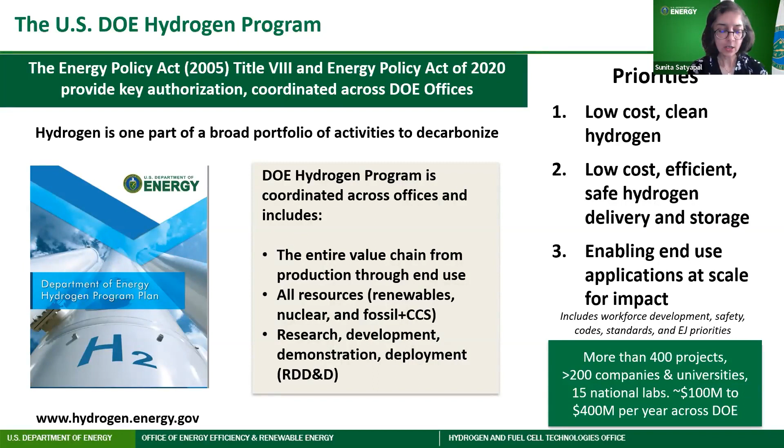So that's really our main focus. And that includes workforce development, safety codes and standards, our environmental justice priorities. So in the US, we have the administration priorities in addition to net zero by 2050, a clean grid by 2035, an initiative called Justice 40, where 40% of our federal benefits would impact disadvantaged communities and those who've historically experienced environmental injustice.

And so the H2 at Scale initiative is our key focus, which really depicts the Swiss Army knife perspective of hydrogen. So you can see the versatility, the fact we can use all the resources on the left. And today we have the conventional gas grid shown in gray and the red conventional electric grid, but you can also bypass those and produce hydrogen and then use it for multiple end use applications. So either for power back to the grid or fuel or feedstock. So it really represents that versatility, the flexibility, and providing different options for hydrogen.

But our focus is really hard to decarbonize sectors. So first, industrial applications such as steel alone accounts for over 7% of global emissions, ammonia, other examples, chemical fuels, transportation, especially heavy duty transport, and then power and energy storage.

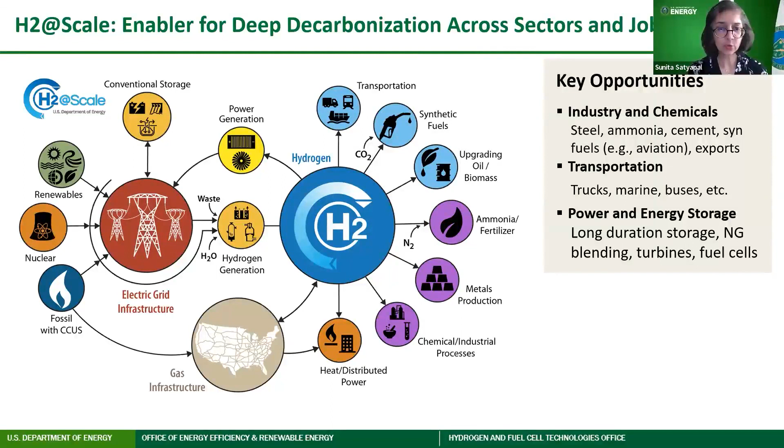From the US perspective, with our administration's goal of a completely clean grid by 2035, as we see renewables increase, we'll have greater need for long duration storage. We already produce about 10 million metric tons of hydrogen per year, and we see scenarios for significantly more. If we produced another 10 million tons, that would basically require doubling today's solar or wind deployment. So there's huge opportunity for nuclear to hydrogen.

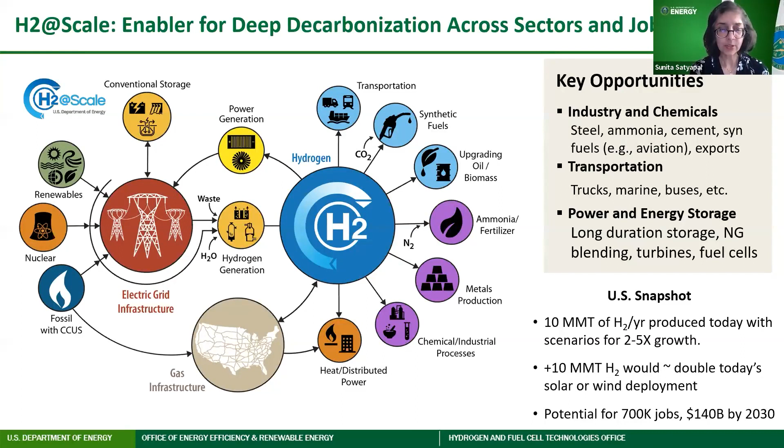Where are we today in the US? We actually have thousands of fuel cells, multiple applications, niche markets such as over 50,000 forklifts operating in major distribution warehouses - Amazon, Walmart, major companies - for completely zero emissions, over 115 hydrogen stations just for the fuel cell market. That's really helped incentivize the market, build up the infrastructure: backup power, thousands of fuel cells for cell phone towers, stationary power, over 12,000 commercial vehicles mostly in California, about 50 stations, buses.

The top map shows that most regions have natural gas to hydrogen, some flagship projects there. The bottom map shows examples of PEMs, proton exchange membrane electrolyzer installations. This is continuously changing; this is the version we posted from June of last year, and we'll be updating it, but you can see over 170 megawatts. We also have over 1,600 miles of hydrogen dedicated pipeline in the US, about 3 geological caverns, including the world's largest in Texas. So we see this growing infrastructure in this nascent market.

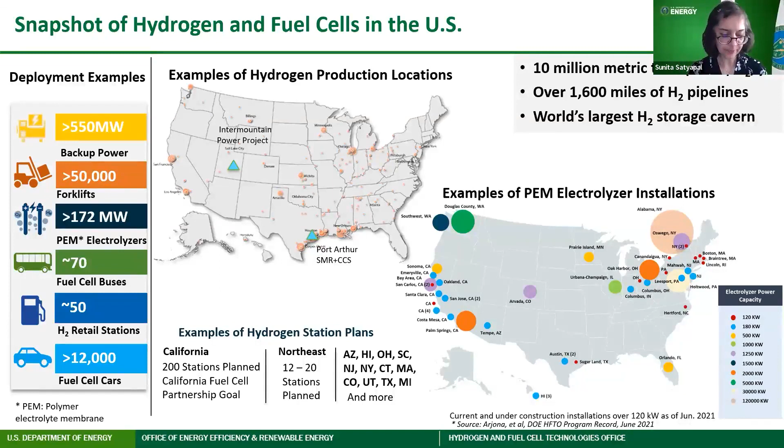I wanted to emphasize the nuclear projects. We're really excited, both my office and the Office of Nuclear Energy at DOE, co-funding 5 projects now, very recently announced, specifically for nuclear to hydrogen. These will be coming online in the next few years, and you can see the geographical variation here - specific plants in Ohio, New York, and others around the country. We'll be using electrolysis and producing hydrogen, and basically these will be first of a kind demonstrations.

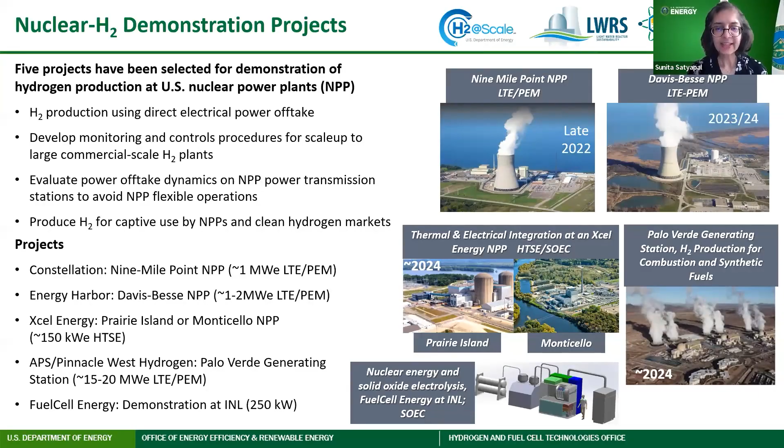The next slide will summarize the key initiative here that I want to emphasize, which is the hydrogen shot. We had, in response to President Biden's request last year at the climate summit to our Secretary of Energy, a question of how can we really accelerate our progress. This is similar to the moonshot that the US had over half a century ago with John F. Kennedy. There'll be a series of energy Earth shots, and the very first was the hydrogen shot, a bold ambitious target of 1-1-1: $1 for 1 kilogram of clean hydrogen in 1 decade. That is the shot, and we have all hands on deck to achieve that goal within a decade.

With all of those challenges and needs, I wanted to highlight the most recent announcements in the US with the Bipartisan Infrastructure Law, or Infrastructure Investment and Jobs Act. This provides $9.5 billion for clean hydrogen, including $1.5 billion both for electrolysis - that's $1 billion - and then $500 million for clean hydrogen manufacturing and recycling. So we'll start with the end of life in mind, whether it's catalysts or other components, designed for recyclability and sustainability.

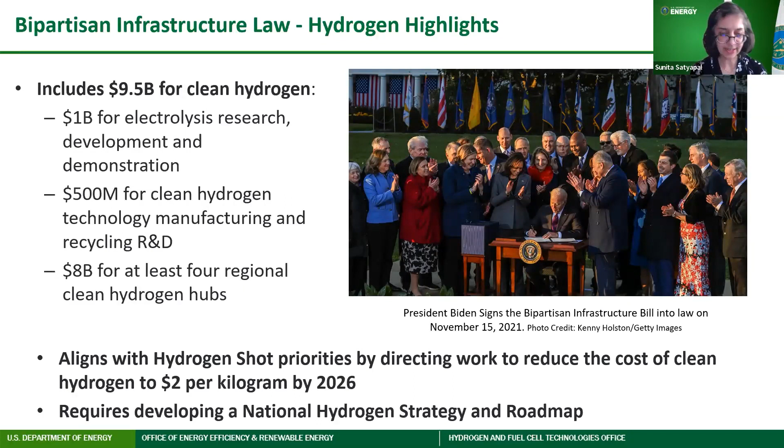This is a very quickly moving field, so feel free to stay tuned. We have Increase Your H2IQ webinars, newsletters, a Center for Hydrogen Safety with over 70 global members and partners, industry, and the Hydrogen Council, providing training material, accreditation, incidents and best practices. Then June 6th to 8th we have our virtual DOE-wide hydrogen program review, where we'll present our hundreds of projects. We typically get a couple of thousand people.

1.008 is the atomic weight of hydrogen, so October 8th is designated in the US as National Hydrogen Day, where again we spread the word. Public awareness is one of the challenges, so please do feel free to sign up for any of our resource information.

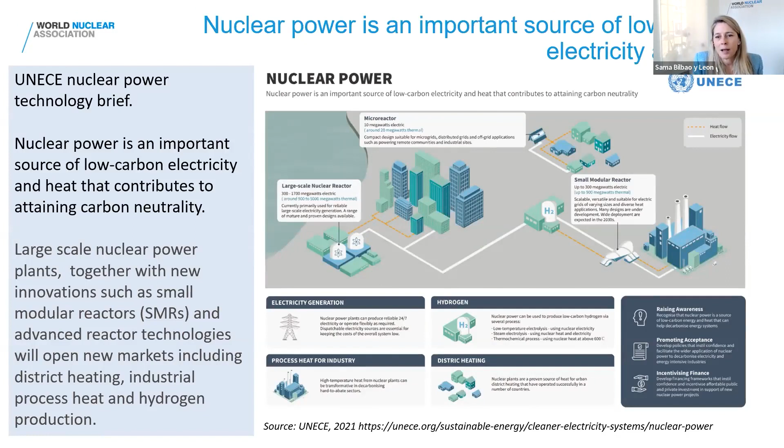One thing I would like to highlight is that this brief emphasizes that in order to achieve this energy transition, we are going to need large-scale nuclear power plants. We are also going to need small modular reactors and advanced reactors using different technologies, as well as micro reactors - they all have their different optimum applications and all have an important role to play. So if we go to the next slide, I'd like to show you another very important document that is part of this toolkit, which is the report on life cycle assessment of energy sources.

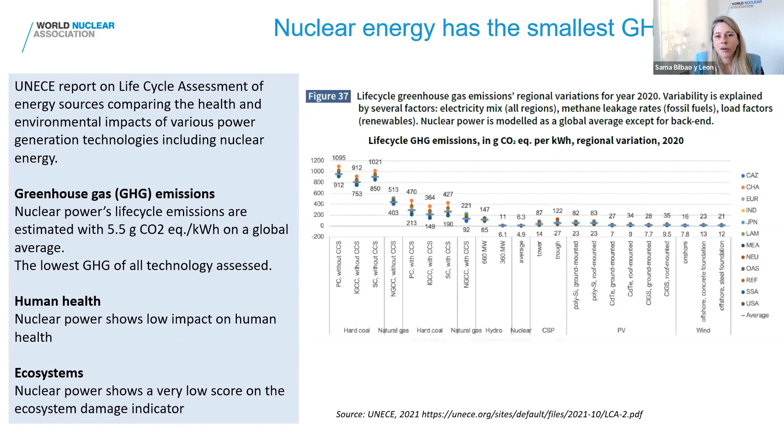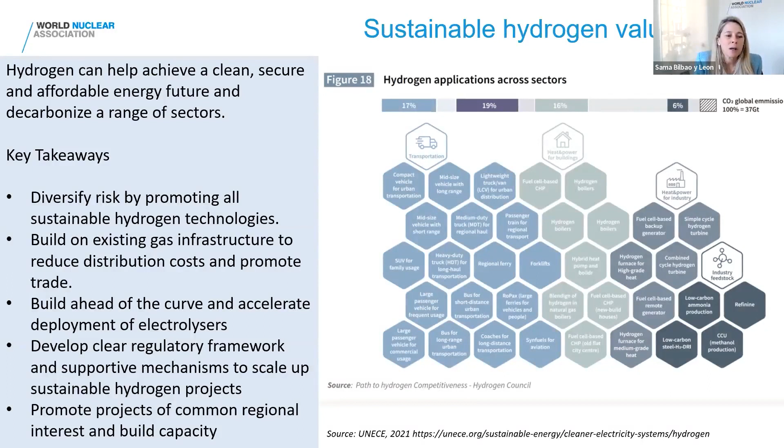So let me finalize very quickly, Shannon. In addition to these documents already available on the website, I want to highlight that UNECE is working on a project on sustainable hydrogen production pathways. The project is working on the premise that hydrogen could supply up to 24% of the world's energy by 2050. This project is particularly aimed to help countries in Eastern Europe and Central Asia develop their national hydrogen action plans and accelerate any needed action.

I'm not going to walk you through the different phases, but I think this is a very solid project that, like many of the other activities in UNECE, is an excellent opportunity to develop capabilities and move forward in this clean energy transition.

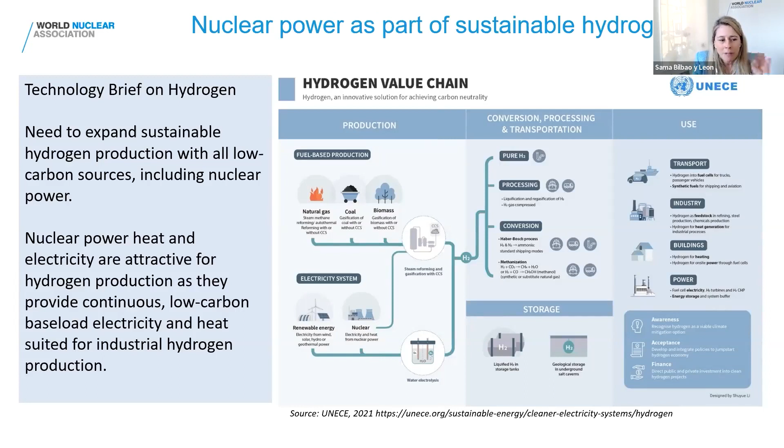So I'll stop here. You can go to the last slide, but with this I'll stop, and I'm back to you, Shannon.

Thank you so much, Sama. That sounds really exciting. It's nice to see some of these collaborative efforts globally.

What would you say is the unique value of this UNECE toolkit, specifically to policymakers? Well, I think that, first of all, it comes from UNECE, so that already comes with a very strong pedigree.

As you know, all UN organizations are very interactive with all the member states. So we are making sure that it's going to reach the right people at the government levels in a very large number of countries, because the UNECE is a very large part of the world.

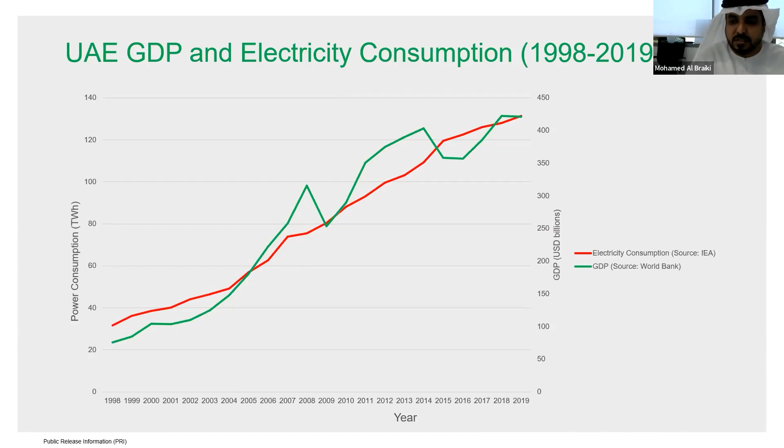If we go to the next slide, as you can see, we all recognize that the world is facing an enormous challenge in the face of rising emissions and climate change. In developed economies, this is looked at from the perspective of reducing emissions. At the same time, growing economies like the UAE need an increasing amount of energy to power that economic growth. Generating the electricity needed to ensure sustained economic growth is one aspect, but this is compounded by the need to do this using clean energy technologies.

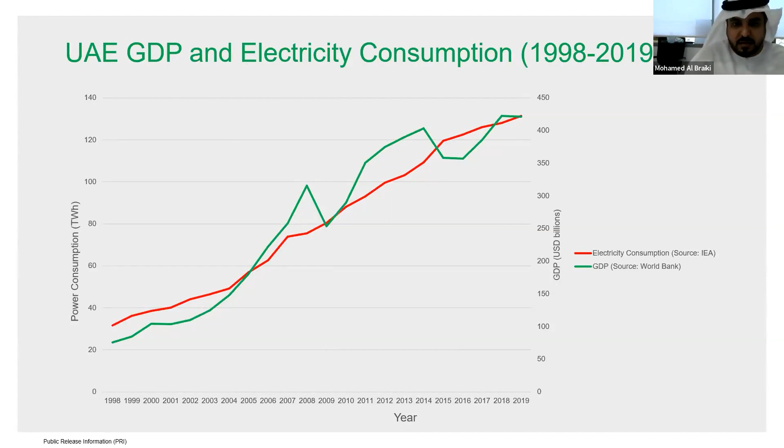In fact, the UAE was the first country in the region to commit to achieving net zero emissions by 2050 for electricity production. The only way we can do this is by using a combination of reliable, zero carbon nuclear energy and renewables, especially when it comes to solar power. But to decarbonize other sectors, we would need low carbon alternatives like hydrogen.

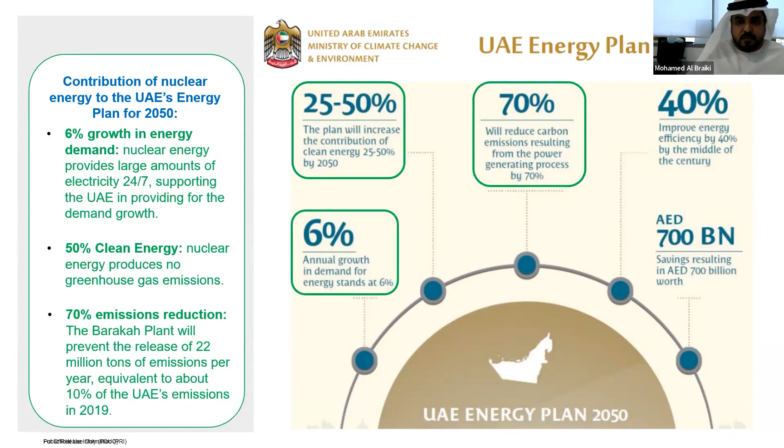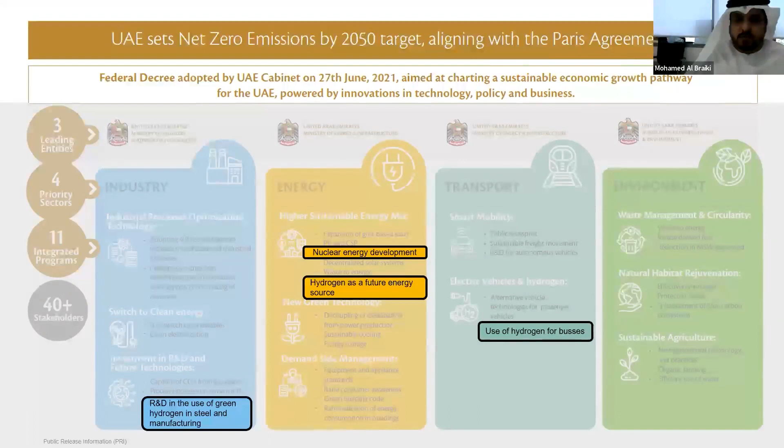At the next slide, I'd like to shed some light on the UAE's pathway to net zero. Net zero is powered by over 11 integrated programs in 4 priority sectors, outlined in the federal decree published by the UAE Cabinet in June last year. Most notably here is the sustainable energy mix, which includes nuclear energy development. The Barakah plant is already leading the largest decarbonization effort in the UAE and will reduce the nation's carbon emissions by 22.4 million tons every year. That is like taking 4.8 million cars off the roads annually.

Additionally, we see the need for hydrogen as a future energy source in industry, energy, and transportation.

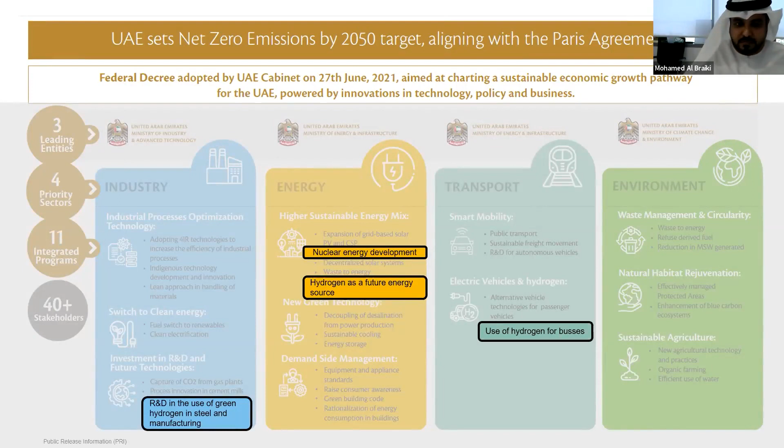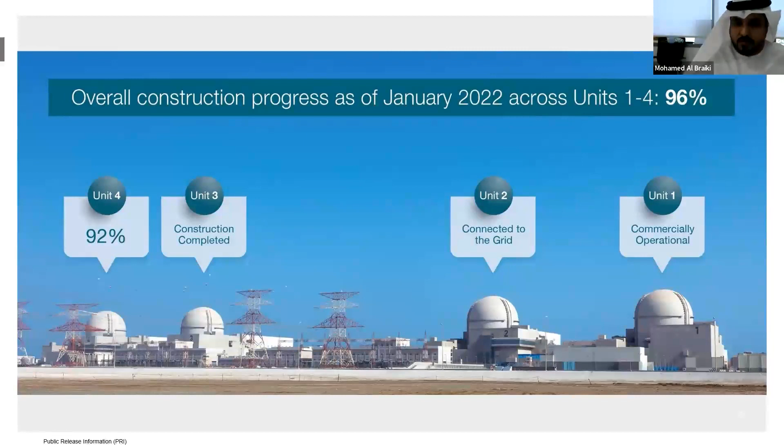Next slide, thank you. However, having the 4 plants fully operational, the plant has a much bigger potential than just electricity generation. Many existing light water reactor plants, as we heard from Dr. Sunita and Sama, are beginning to integrate electrolysis equipment at their plants to cleanly and affordably meet their own hydrogen demand. An early opportunity for ENEC is to install electrolysis at Barakah plants and establish a leading edge in technology capability. The 4 units of the plant have the potential of generating up to 1 million tons of hydrogen per year.

This clean fuel can be used in many sectors, including heating, transportation, manufacturing, and others. In this way, the Barakah plant can help decarbonize not just electricity generation, but also the other energy-related emissions that contribute to climate change. Today, the UAE is in a unique position when it comes to existing infrastructure, because it's a premier producer, as you know, with top-of-the-line storage and transportation capabilities of liquid fuels.

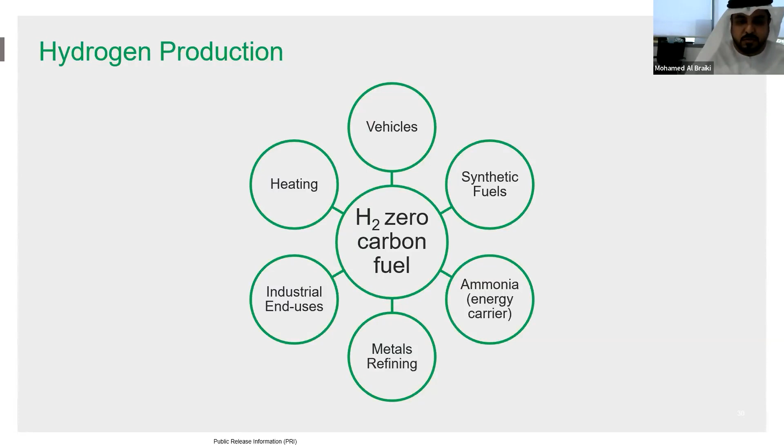I'd like to conclude with this slide that the UAE is a regional pioneer in many aspects. The Barakah plant is the first nuclear energy plant in the Arab world, making us the regional leader in developing the knowledge, expertise, and skills needed to safely operate a nuclear plant. Now we're looking at ways and opportunities, potentials to apply our expertise and know-how into becoming a regional leader in nuclear-produced hydrogen. In addition to the benefits this has for decarbonizing the economy, it also presents us with opportunities to lead on the development and deployment of new technologies.

Such as high temperature electrolysis, also opening up opportunities in research and development. As Dr. Sunita mentioned, the possibilities are endless, and the opportunity is big. But when it comes to nuclear science and technology, the UAE is clearly leading the way in decarbonization and sustainable development.

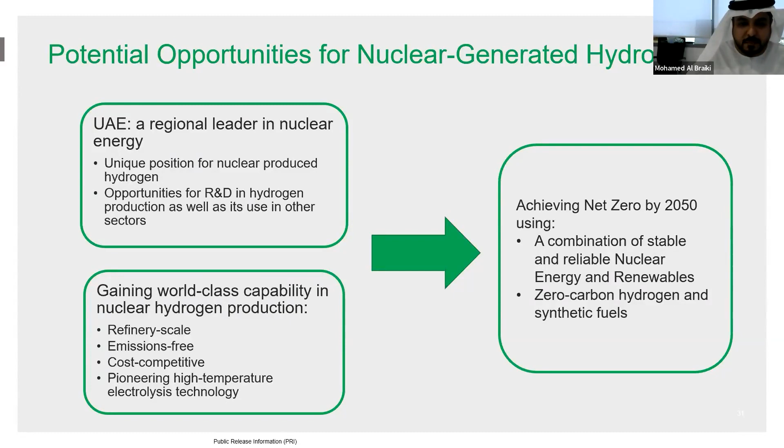With that, thank you very much, and I will wait for any questions that you might have.

Thank you so much for those remarks. Your presentation makes it quite clear that the UAE is a pioneer in your region, and there's also great potential for additional technology in your region.

So as you think about that, what do you see as the primary challenges for hydrogen production from nuclear energy as you move forward? The challenges right now, as we heard from Dr. Sunita and Sama, the technology to produce hydrogen is there, and the cost is coming down, but we also need to think about challenges in the supply chain throughout the production of hydrogen and coupling it with nuclear. That would include transporting the hydrogen. Once we produce it, we need to distribute it. For that, you need to form partnerships with other organizations and utilize the existing infrastructure that we have. So we need to study it throughout and align with the right partnerships to make it happen.

Thank you. And where do you see the demand for hydrogen? What are the hydrogen markets you are specifically looking at in the Arab world? Yes, as I mentioned, last year the UAE was the first in the region to commit to achieving net zero by 2050. Several other countries followed after that. Hydrogen as a zero carbon fuel will help decarbonize a lot of sectors that are currently hard to decarbonize -- transportation, industry, heating, and many others. So the prospects of the hydrogen market within the UAE and the Arab world, I think, are very, very huge.

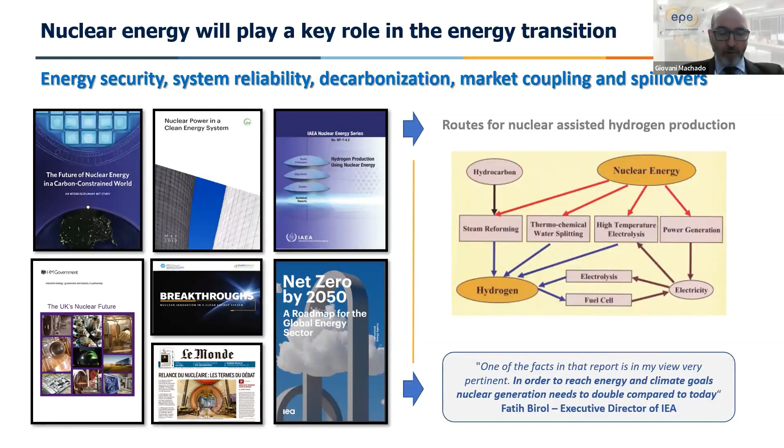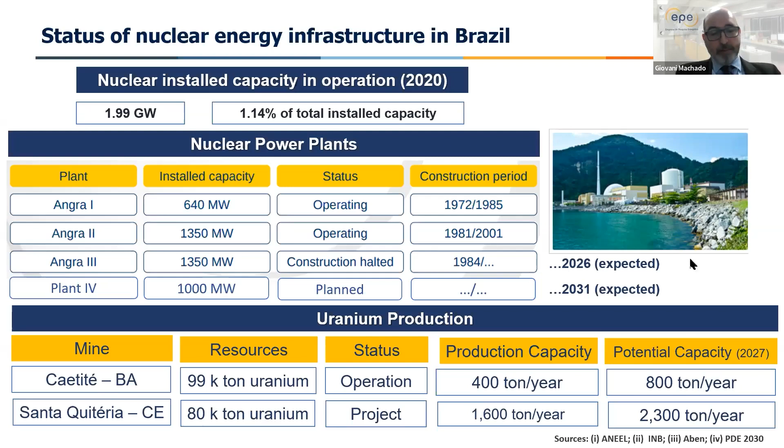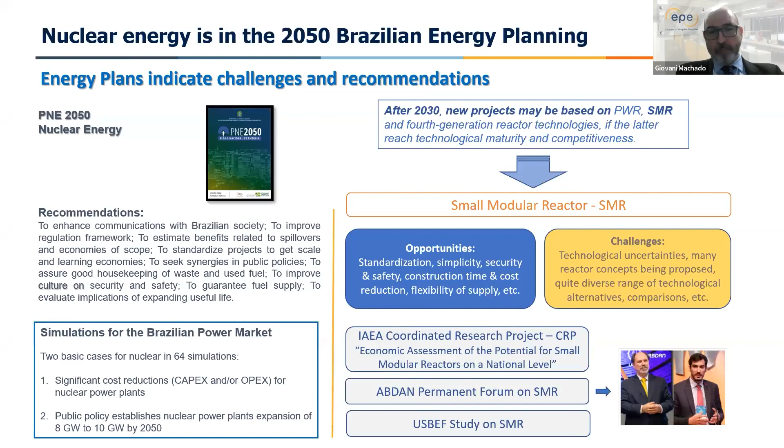It's important to say that nuclear is not only in energy planning in Brazil, but it's a real thing. It's going forward, and there are a lot of pieces of legislation and regulations to promote new investments in nuclear in Brazil. Next, please.

Going to hydrogen, it's very important to say that government support in R&D and innovation is not new in Brazil. There is a long-term commitment to hydrogen, and this commitment brought some results already. I'm not talking only about programs, plans, white papers, and resolutions for the National Council for Energy Policy in Brazil, but mainly all the market, technological, and human results that this commitment brought already. I'm talking about capacity building, both institutional and technological and human capital formation.

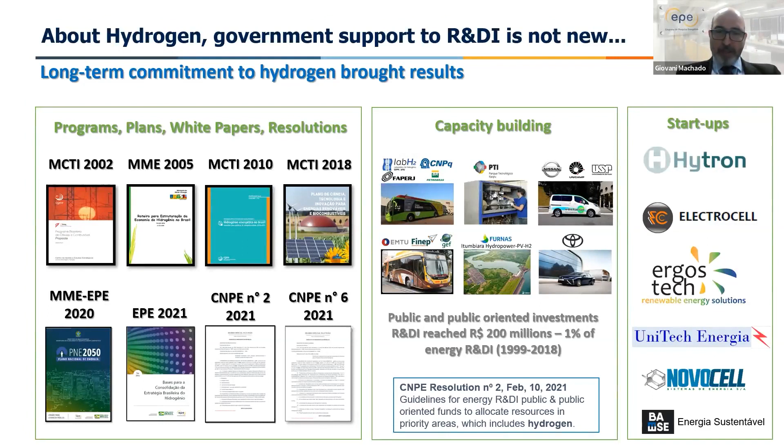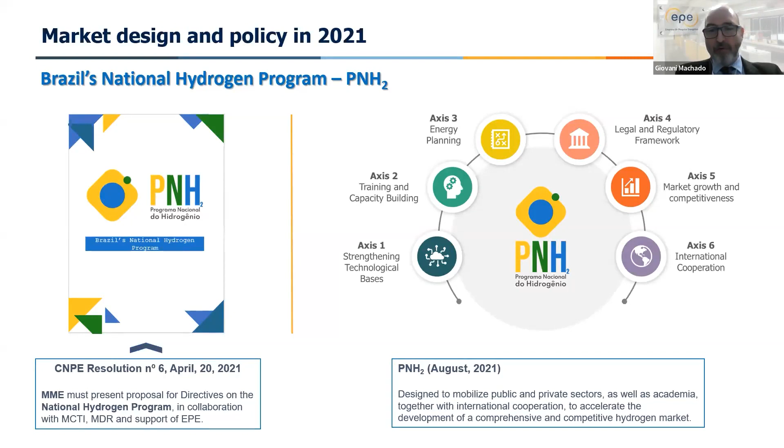Recently, we released the Brazilian National Hydrogen Program, the PNH2, and it started with a resolution of the CNPE last April, 2021. It covers different aspects of the hydrogen economy, going from technological aspects to training and capacity building, energy planning, legal and regulatory framework, market growth and competitiveness, and also, of course, international cooperation.

We have a technology agnostic approach. We focus on low carbon hydrogen. It's a very similar approach to the H2@Scale initiative presented today by our colleague from DOE.

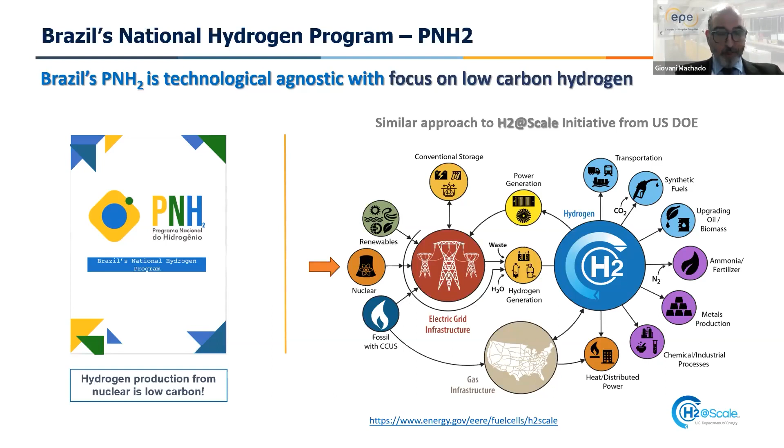Probably this is one of the most important issues in my presentation, just to make clear that hydrogen production from nuclear in Brazil is already there. As of today, we already produce some hydrogen as a byproduct from the process to make sodium hypochlorite from seawater based on electrolysis, but because of the concentration, it's still 96% purity, so it's not placed in the market already. By the opposite, it's vented to the atmosphere.

But there is already a pre-feasibility study, and the project shows that it's cost effective to invest in a purification unit, so you can enhance the concentration to 99% purity. And the payback is less than 2 years. So we understand that this project, when detailed, will go ahead.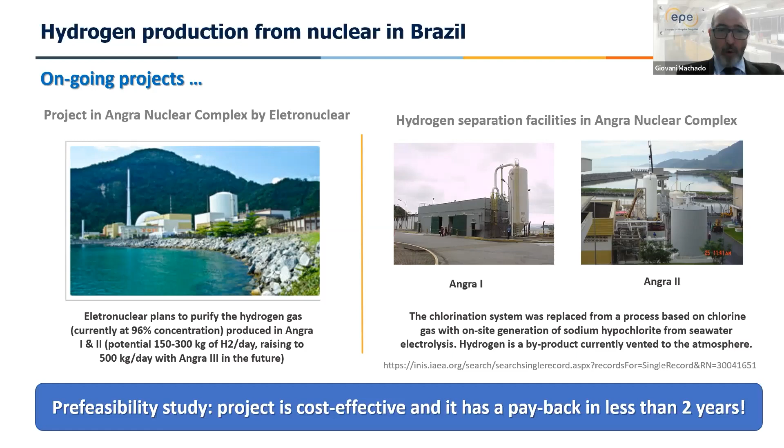So just to conclude my presentation and wrap it up, some key messages. We see that nuclear has a role in the energy transition basically related to energy security, system reliability, decarbonization, and spillovers—technological spillovers—and the possibility of coupling with other markets, not only the carbon market, but also industrial markets, particularly for supplying heat and hydrogen. There is a lot going on in Brazil, and particularly we see SMR bringing new opportunities to the nuclear industry in Brazil, particularly related to hydrogen. And we see the nuclear-hydrogen nexus as something to improve the economics of both.

But of course, as with everything related to nuclear, engagement and communication still matter for achieving that. So that's all I have for today. I'll leave it back to Shannon. Thank you so much. Thank you, Giovani.

It's very clear that Brazil has a commitment to hydrogen, and I really appreciate seeing the technology agnostic approach. Given that, what is the position of the Brazilian government on the role of nuclear energy in producing hydrogen?

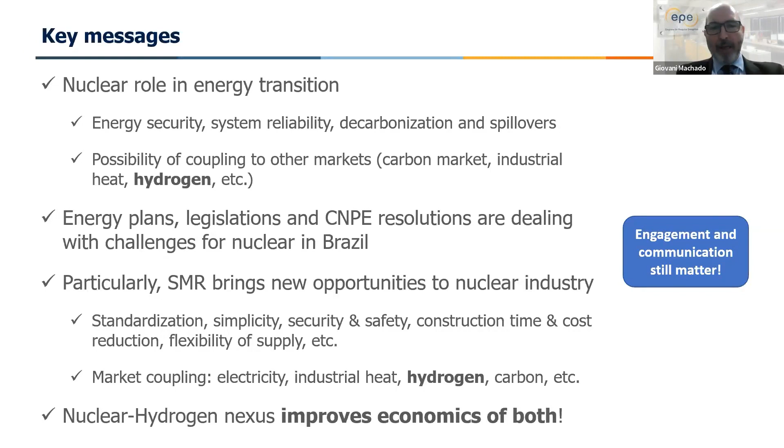But even then, we understand that we should not leave the other technologies to produce hydrogen behind. So we have to focus on, once again, low carbon hydrogen. Doesn't matter the kind of technology you provide, the focus should be on the cost and on getting low carbon hydrogen. That's our view. I agree with that view. Low carbon is essential to our climate solutions.

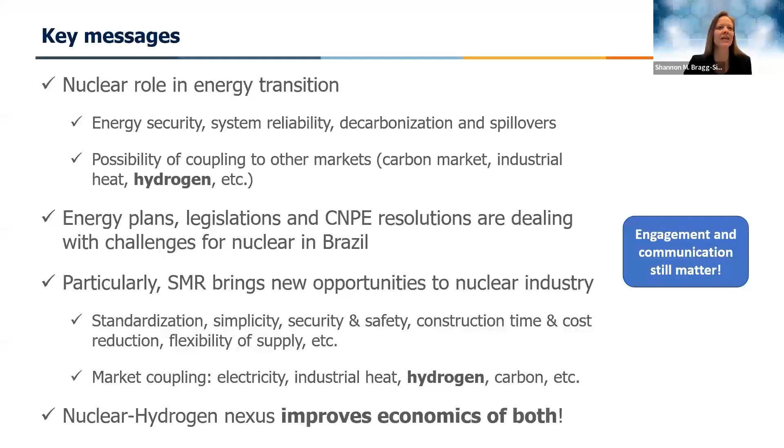Thank you so much for giving us a glimpse of what's going on in Brazil. Really exciting times. We are going to move to our next speaker now, where we turn to Japan, where there is certainly great interest in hydrogen, and we've seen some of that growth in that interest recently.

It is my pleasure to introduce Dr. Nariaki Sakaba, who is the Deputy Director General at the High Temperature Gas Cooled Center within the Japan Atomic Energy Agency. Dr. Sakaba's specialty is in chemistry and nuclear energy, a perfect combination for these projects. He is also the project leader for the High Temperature Test Reactor, or HTTR, and the Hydrogen Production Project at JAEA. Dr. Sakaba, the floor is yours.

Thank you, Shannon. On behalf of the Japanese government, I appreciate the Nice Future webinar for the invitation. JAEA has been developing high temperature gas cooled reactor and its related technology for more than 30 years. Today, I would like to introduce our current development status concerning the HTGR and hydrogen production technology towards carbon neutrality.

First of all, I would like to show the greenhouse gas emissions in Japan. Last year, at the Leaders Summit on Climate, the Japanese Prime Minister presented a plan for global warming countermeasures, that is, a midterm target of 46% reduction by fiscal year 2030 compared with 2013. Two months after the summit, the Japanese government stated the green growth strategy through achieving carbon neutrality in 2050.

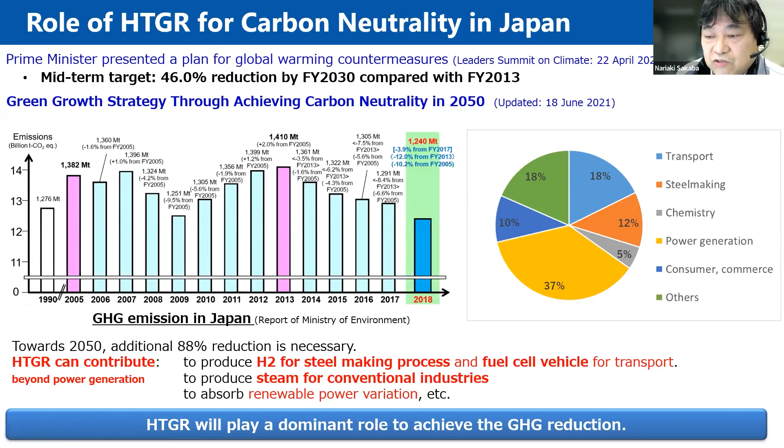Japan Atomic Energy Agency has been developing HTGR since the 1960s. We constructed the HTTR, the only prismatic type HTGR in operation in the world. Major specifications of the HTTR are thermal power of 30 megawatts, fuel is coated fuel particle, prismatic type, core material is graphite, coolant is helium, and reactor outlet coolant temperature is 950 degrees C.

The HTTR's major achievements are: first criticality attained in 1998, and 50-day continuous 950 degree operation performed in 2010. And very recently, we carried out the station blackout test in January this year.

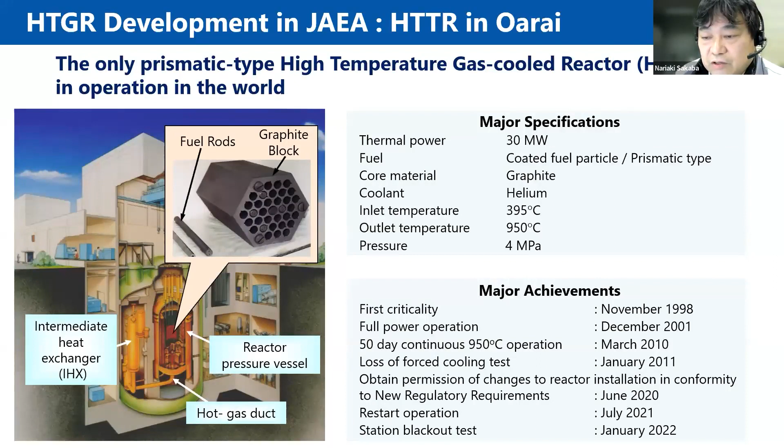After the Fukushima Daiichi accident, new regulatory requirements were required. The progress of getting permission from the NRA shows in the next slide.

This slide shows the licensing progress of the HTTR. Following the nuclear accident at TEPCO's Fukushima Daiichi in March 2011, revised regulatory requirements were issued by the NRA in July 2013. JAEA had submitted the application, including evaluation results, satisfying the new regulatory requirements to the NRA in 2014. Through many discussions with the NRA, in June 2020, JAEA obtained the permission by the NRA for change to reactor installation of the HTTR. HTTR has restarted its operation in 2021. It spent approximately 10 years after the Fukushima Daiichi accident, but we could restart the HTTR operation again. For getting permission, the result of safety demonstration tests performed before the Fukushima accident contributed.

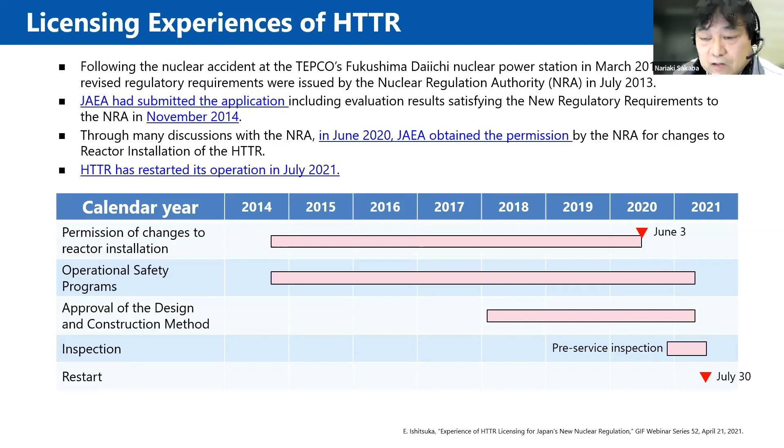Next slide, I show the test result of the safety demonstration test. In order to confirm the inherent safety features of HTGR, JAEA conducted some safety demonstration tests. The first test was carried out in 2011, just before the great earthquake in Japan. The right side graph shows the results. The initial power of the HTTR was 30%. All of the primary gas circulators were stopped at time 0. The core flow rate becomes 0 immediately. During the whole test time, no control rod was inserted. The test results showed that the reactor is naturally shut down as soon as the core cooling flow rate reaches 0. The reactor and fuel temperature are kept stable long after the loss of core cooling. This is the inherent safety characteristic of HTGR itself.

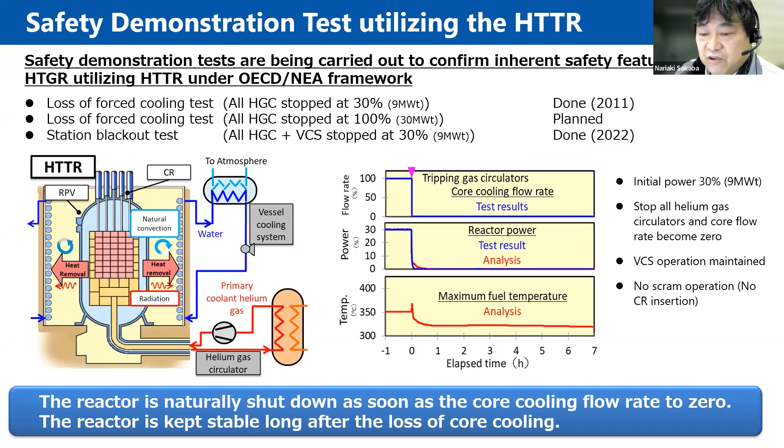From the next slide, I introduce R&D for hydrogen. Hydrogen production from water utilizing nuclear energy offers one of the most attractive zero emission energy strategies to meet massive demand for hydrogen.

Because of its advantage over other water-splitting hydrogen production processes using heat from HTGR, the iodine sulfur process has been selected by JAEA as an important research priority for future technologies. The IS process is composed of 3 main chemical reactions.

Please see the left side figure. The first reaction produces hydrogen iodide and sulfuric acid from water, sulfur dioxide, and iodine. It is known as the Bunsen reaction. The produced hydrogen iodide and sulfuric acid are then decomposed to produce hydrogen and oxygen respectively. The reaction products SO2 and I2 are recycled, allowing a closed cycle.

These reactions are endothermic, and the temperature range adapts well to the sensible heat provided from helium gas in the HTGR. This is the mechanism of the IS process.

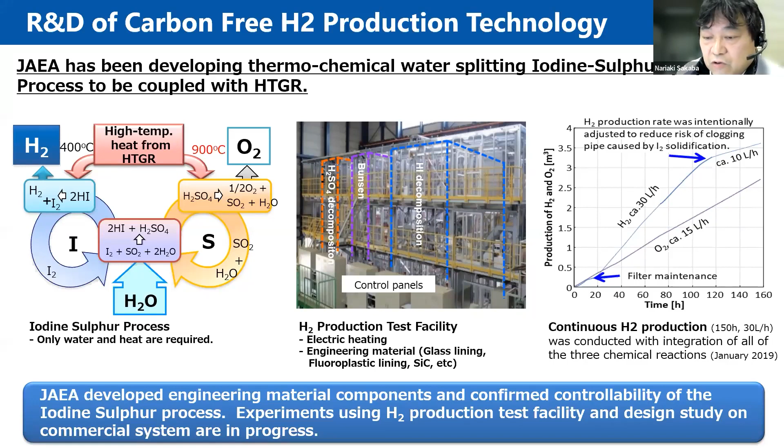JAEA developed engineering material components and confirmed the controllability of the iodine sulfur process. Experiments using the hydrogen production test facility and design study on a commercial system are in progress. The next slide shows the R&D for coupling technology between HTTR and the hydrogen production facility.

From now on, we are going to start the HTTR hydrogen production test project under METI. Utilizing the actual heat generated from the HTTR, a hydrogen production facility will be connected to demonstrate nuclear produced hydrogen.

During the project, we will develop coupling technology between HTGR and the hydrogen plant, including the safety case, and construct a steam reforming hydrogen production system as downstream of the HTTR secondary helium cooling system. We will demonstrate operability to confirm safe and stable continuous nuclear hydrogen production.

R&D of carbon-free hydrogen production systems, such as iodine sulfur process or SOEC, will be performed in parallel. We will then replace the steam reforming system for the next step. It is expected to be the world's first demonstration of nuclear produced hydrogen.

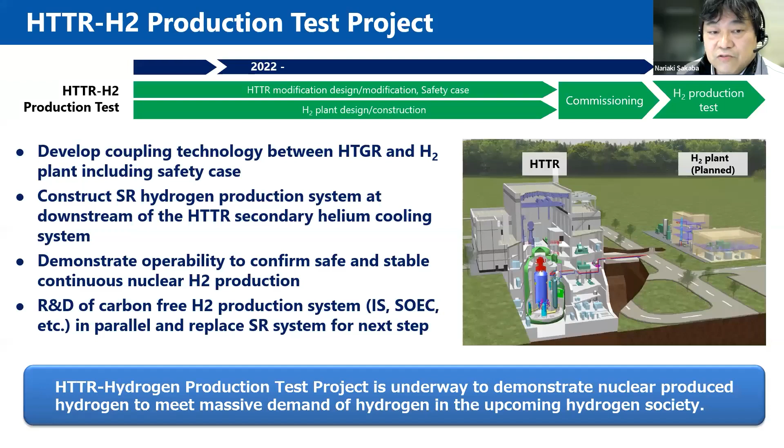This is the last slide. Our role in HTGR development is to develop key technology needed by commercial HTGR, and provide R&D test beds of unique experimental and computational capabilities, as well as knowledge and databases to industry. We promote international standardization of technologies and standards through international collaborations. JAEA has experimental capabilities, computational capabilities, IPs, knowledge, and databases, and can contribute to the realization of commercial HTGR systems.

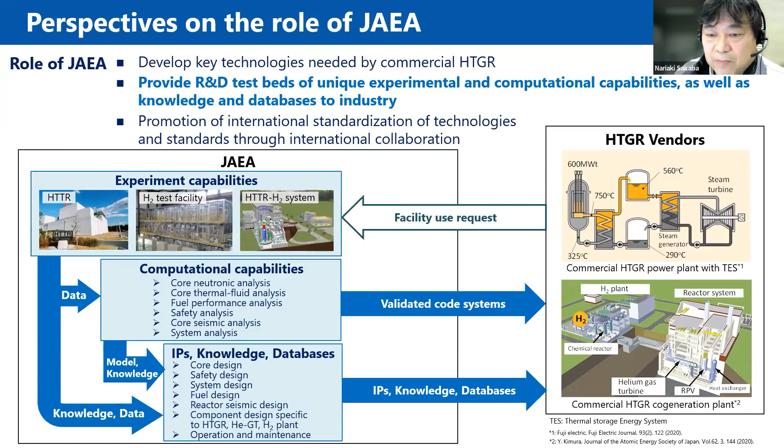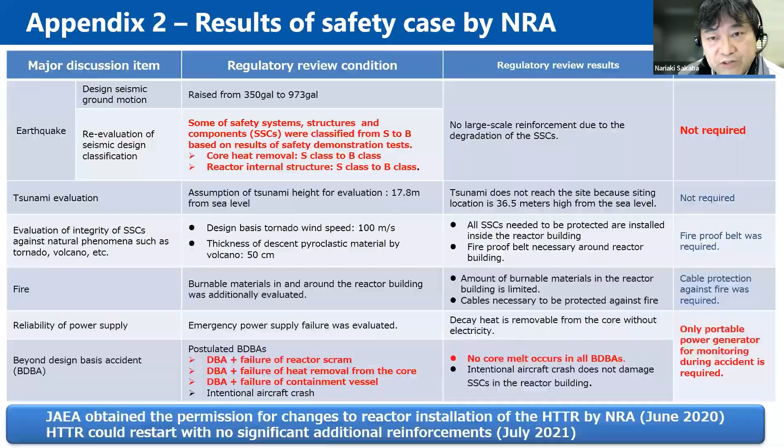Thank you so much for your presentation, Sakaba-san. I'm really excited personally to see the High Temperature Engineering Test Reactor restarted.

My team has worked with your colleagues at JAEA on some of these studies related to hydrogen production, and there's really a great opportunity. How about inside Japan? Is there support for the hydrogen production and HTTR projects within your country?

Well, we have communities and we share information on our status with many end users like Toyota, Honda, or steel making process facilities, as well as makers, Japanese industry such as Mitsubishi Heavy Industries, Toshiba, or Hitachi, and all of the industries. We have such a community and share our progress on hydrogen production. We are now discussing under METI how we will proceed with our development for 2050, and the Japanese government has stated our HTTR hydrogen production project as part of the green growth strategy.

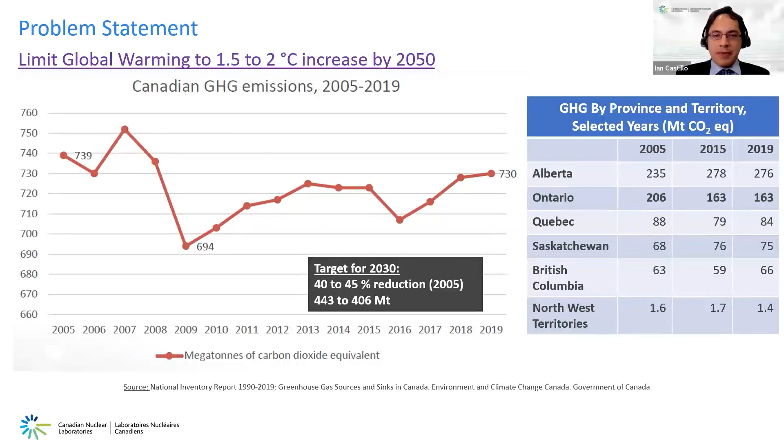Next slide, please. All right, so now what do we need to get to net zero? What are the pathways and what are the critical needs? Starting on the left-hand side, in terms of pathways, to name some key bullets, we need energy efficiency, hydrogen-based economy, as all speakers have indicated before me, large-scale electrification, obviously relying strongly on renewables such as wind and solar, and on technologies such as carbon capture, utilization, and sequestration.

But some of the critical needs that are important or enablers to get through these barriers is to level the playing field.

I've been hearing what are the key questions that we need to answer. I think some of them involve developing a strong carbon economy, whether it's a carbon tax, carbon credits, low carbon incentives, or a combination of those mechanisms, as well as large scale deployment of technology, whether it's electrolysis or electrofuels, to really abate the high emitting industries such as cement and steel, and large deployment of energy storage, whether it's geothermal, pump hydro, or some other combination. An important economic point too is to mind the investment gap.

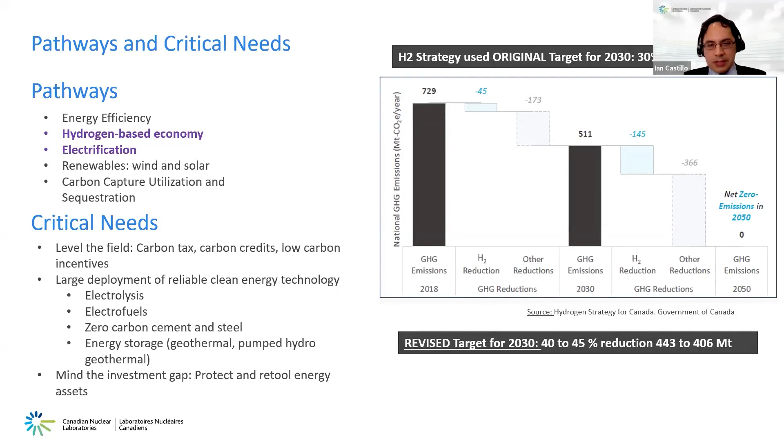Just like other speakers, there are many other ways to use electricity and heat to produce hydrogen derivatives as well as other products. I won't go into this slide in a lot of detail, but what's important to recognize is, starting on the left-hand side, you have electricity and heat, especially renewables, at low carbon intensity. You want to find ways to utilize technology in the form of electrolyzers or thermochemical processes to convert that electricity and heat into hydrogen and oxygen. Then you have the opportunity to connect it with carbon in the form of biomass or carbon dioxide, creating a secondary set of streams that could go to processes such as Haber-Bosch, alcohols production, and Fischer-Tropsch, to give you ammonia, methanol, synthetic fuel, and other products. So it's important to keep in mind that we have hydrogen and hydrogen derivatives in this picture.

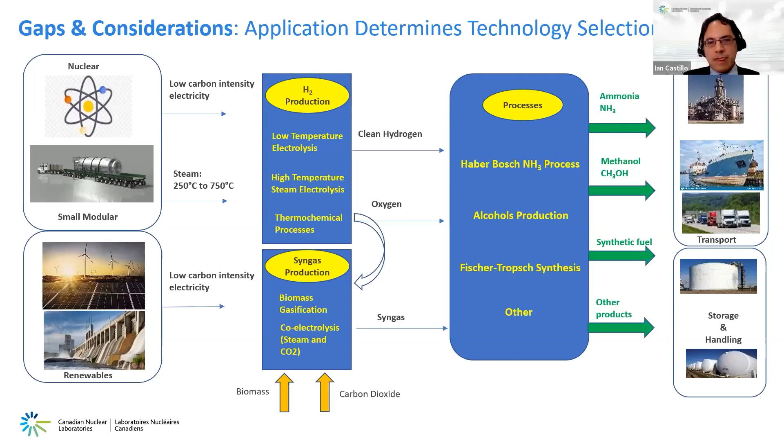The next slide connects Alberta and Saskatchewan. In Alberta, there is a large connection with the oil industry in the Edmonton area and center of the slide, and Saskatchewan has a large connection with oil and gas and fertilizers.

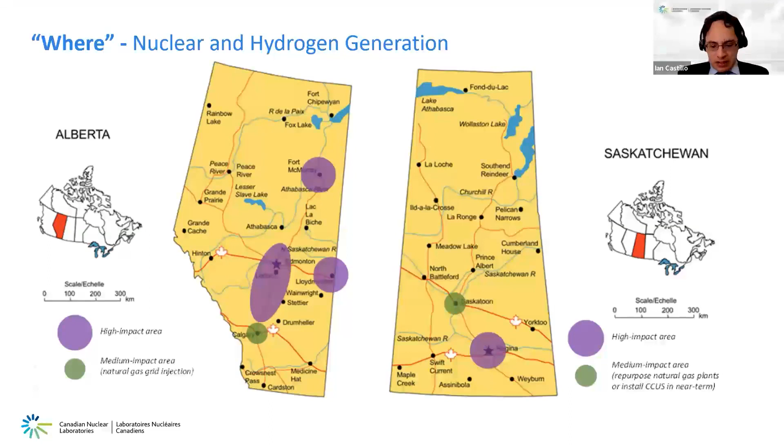Wrapping up this presentation, as we've been hearing through the different presenters, it's important to have specific solutions that combine all these energy, electricity, and products coming together.

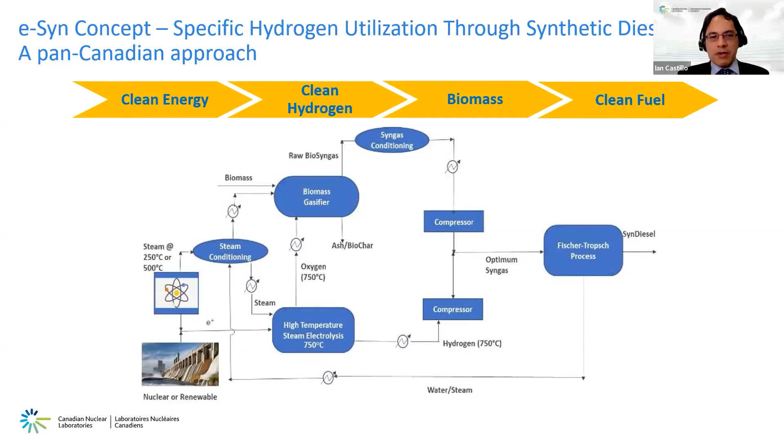So what you have on the screen is an example of what we call the e-Syn approach, where we take in electricity and heat from a nuclear asset or a renewable asset, connected with biomass, which gives you hydrogen as well as carbon, connected with high temperature electrolysis to produce raw syngas in the right ratio to go through a Fischer-Tropsch process to produce synthetic diesel. I think this opportunity shows that we are converting words into actions.

Let's go to the next slide. Very quickly, just wanted to give you a view of what are the targets for Canada.

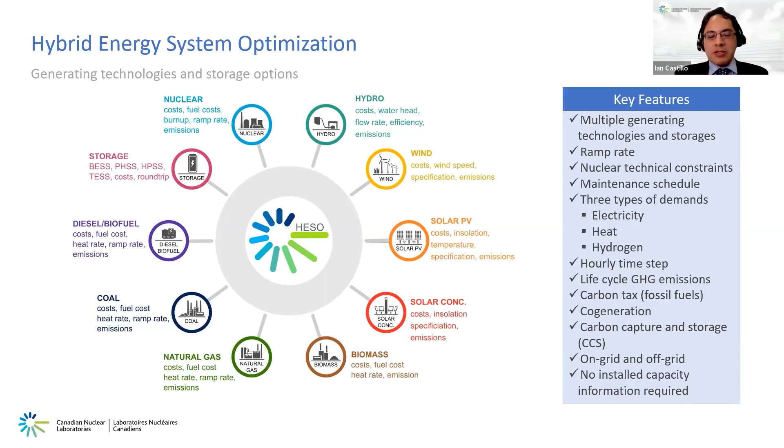And we go to the last slide before we can close the presentation. Now, making Shannon's job very difficult, trying to keep on time. One last part is a big shout out on some of the modeling that has happened at Canadian Nuclear Laboratories and other organizations, where you want to do a hybrid energy system optimization, with electricity supply and different demands. A key piece of information for us is that this model can do modeling on an hourly step.

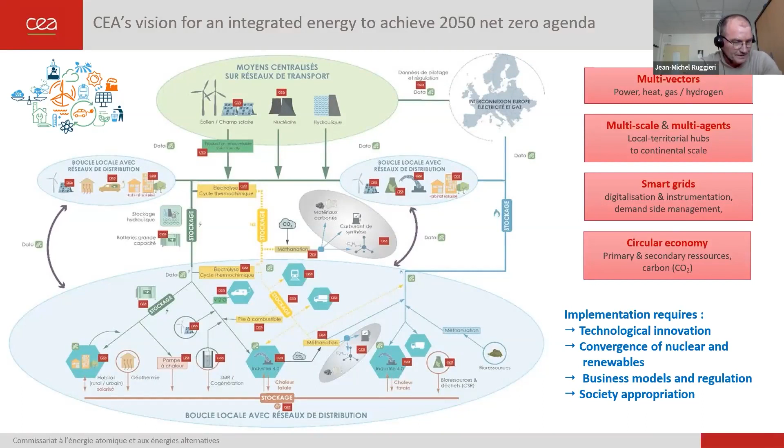The third pillar of this vision is on multi-vector issues, where we look not only at electricity, but also at other vectors and gases like hydrogen, which is one of the main issues we will have to assess in this vision. The last pillar, and not the least, is on circular economy: we would like to use resources like carbon and CO2, because we also think we need to move toward e-fuel generation. This vision needs implementation through technical innovation, convergence between nuclear and renewable, business models and regulation, and also societal approval. Next slide, please.

Okay, thank you. No, the slide before. Okay, how could nuclear energy contribute to this vision? The first thing is that we do think we need to achieve convergence between nuclear and renewable, and for that, at the power plant scale, we need to have flexible nuclear. This is the first thing, to match with variable renewable production that will increase in France. The second thing is we think we need to have SMRs or AMRs.

We need SMRs or AMRs in local energy hubs to provide local energy and power, and also not only power, but also hydrogen, heat, or desalination in this local hub. The third thing is hydrogen production, and for that at CEA we also work on development of high temperature electrolyzers, and we have a joint venture in that field, but I will not speak about that in this presentation. The last thing is the nuclear refinery concept that we would like to propose, to enable the production of e-fuel and e-carbon molecules. Next slide.

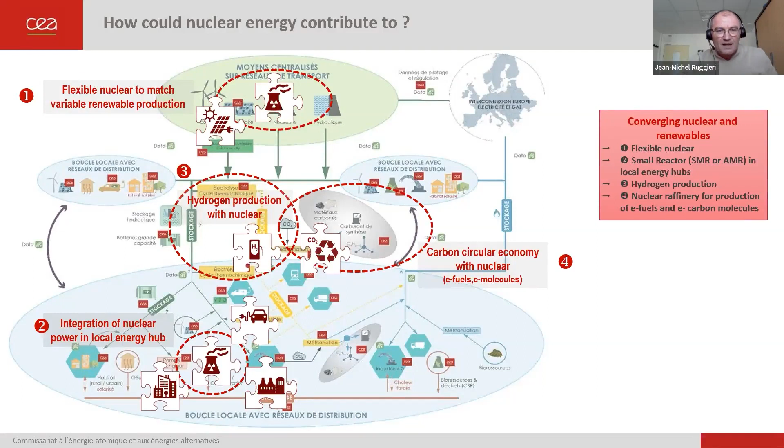In this strategy, we say that we think SMR is a very important issue, and that's why we are working on this to achieve this vision. SMR has to be seen as integrating nuclear energy into a territorial energy hub. The challenge of SMR is to answer several challenges, like a power grid that cannot be suitable for large nuclear capacity, provision of power to isolated sites, or decarbonization by replacement of coal power plants. But not only for electricity, we think SMR opens new cases for nuclear energy, for process heat for energy intensive industry, for district heating, and also for local hydrogen production and territorial use. That's why CEA is focusing on SMR and hybrid systems to develop coupled nuclear systems.

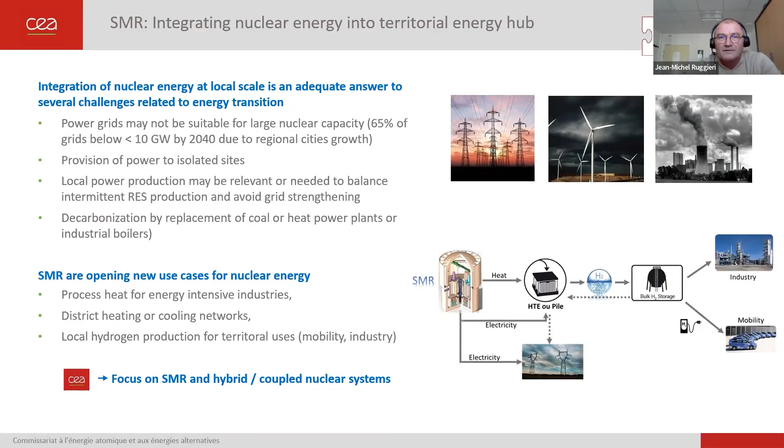This development of SMR is based on two pillars. The first one is the development of SMR Nuward, the French SMR to be developed for the next decade. The project aims for deployment by 2030. The main interesting thing is we want this development to be multi-purpose by design, to assess heat cogeneration and especially hydrogen production. This gives you the timescale for us, the schedule to develop hydrogen production with massive nuclear power plants using this SMR.

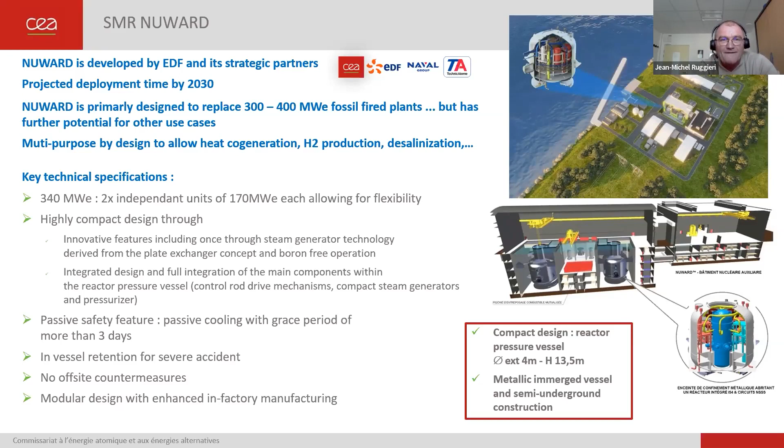We would like to assess this type of system that can provide, together with electricity, heat for high temperature electrolyzer, heat for district heating of industry. And this can be made only by studying the multi-vector energy conversion system. That is one of the R&D parts that we have - it's the fourth part of the R&D on innovative energy conversion systems.

The second thing is to achieve an assessment of the market for hydrogen and heat, because if we do not reach the market, we don't have to develop this type of hybrid SMR. And together with these first pillars, we have launched studies of two types of use cases.

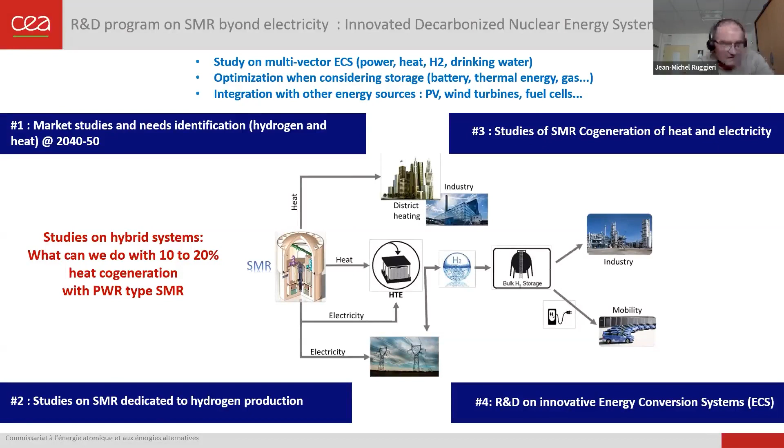This was only to give you an example of what can be achieved by coupling an SMR of 450 megawatt thermal with a high temperature electrolyzer. It can give you 100 tons per day of hydrogen. This gives you an idea of the size, and we are working on this coupling using the solid oxide cell that we are developing at CEA to achieve this type of hydrogen development.

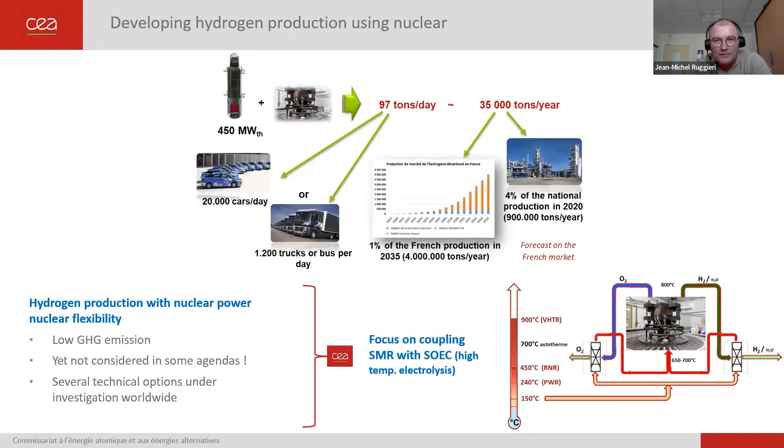In France, we are also involved in the European strategy on the net zero agenda, and we have launched a European project called Tandem. This project aims to identify hybrid systems for hydrogen and heat. At the end, this 3-year project will aim to provide recommendations to stakeholders and policymakers on how to develop this nuclear SMR development for hydrogen and heat.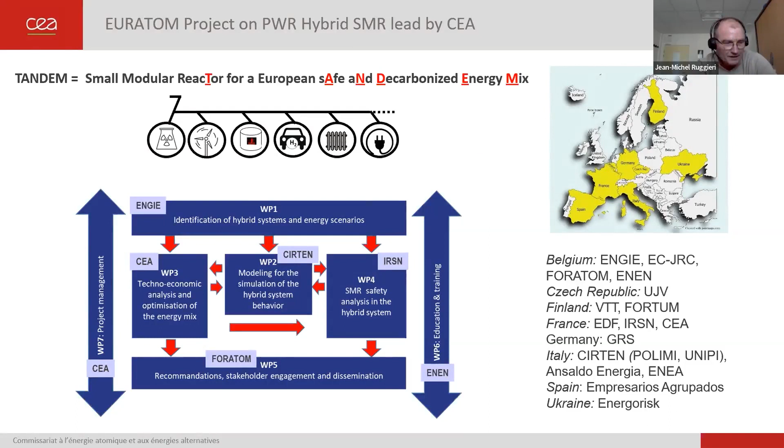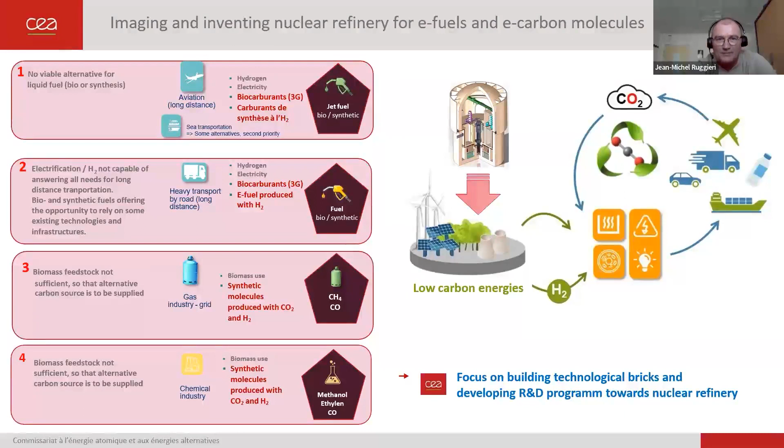That was my last slide. Just to conclude, I can say we have the same problem to solve, and that's global warming and decarbonization of energy, etc. What is amazing is to see the six presentations we have today - we almost reached the same R&D to be developed, the same vision, with the idea that we need a mix between renewable and nuclear. It's very interesting.

And also, what is amazing is that this vision was quite useful for our French government, because they launched two roadmaps, one on hydrogen and one on nuclear, for France 2030. So it's quite interesting to have done this study and to go ahead on that. Thank you, Jean-Michel.

I think you're quite right. We've got a global challenge in front of us with regard to climate change and reducing emissions. And while it shouldn't be surprising that we're all starting to converge around similar solutions on nuclear, renewables, hydrogen, and decarbonizing industry, it is refreshing to see that we're converging and perhaps have opportunities for data sharing and experience sharing to really accelerate this progress.

So my first question to you is, CEA seems to be focusing on small modular reactor solutions, light water reactor solutions. Why are you not pursuing some of the high temperature reactor options being developed to couple with high temperature electrolysis? There are two issues on that.